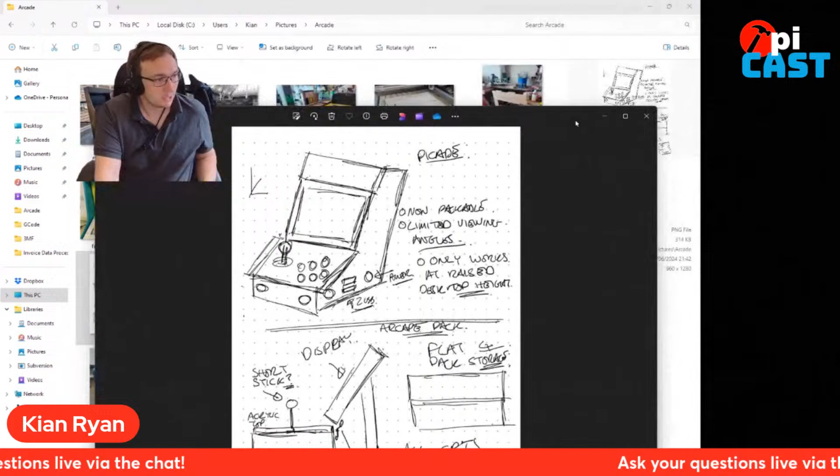So we started off with, here you go. Started off doing some sketches for them. Small cabinets getting bigger and bigger and bigger until we ended up eventually at full-size cabinets. And we made these in-house. CNC'd them on our Shapeoko Pro. And this is our full-size cab that we've ended up with. It's a collapsible cabinet. And in fact, half of it is with us today.

So the whole point about this is that all of the guts live in the top section. In fact, this top section is currently with me here today. So this is the top half of the cabinet. All of the guts live in the top half. There's a Raspberry Pi 4 in here. It's an elongated Picade. Pi 4, Pi Hat, Player 2, two sets of arcade buttons, two sets of consoles, a rollerball because everybody loves playing a bit of Centipede.

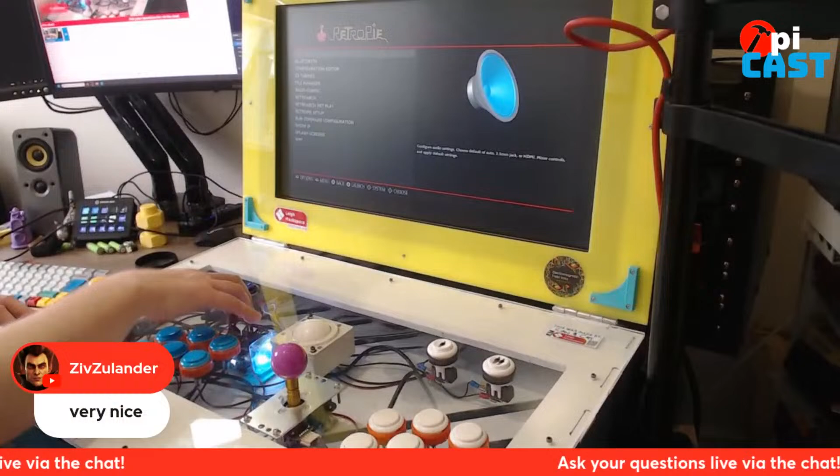Components from all over the shop. We're not just using Sanwa buttons. We've now got some from a Spanish supplier as well. 23-inch display that runs off 12 volts. We take a singular 12 volts 4-amp input coming in from the back. We split that. We use a buck converter to power the Pi, 12 volts going up to the display. So we only need one singular power supply, and all of this lives in this top half of the case, which means that we're free to deal with the rest of the cabinet as a separate entity.

So this lives as just a set of stackable sheets. And if I go to, and we can just treat them as a whole bunch of collapsible things.

That's the worst. I hate this photo with me, but I look like a sitting Buddha at this point.

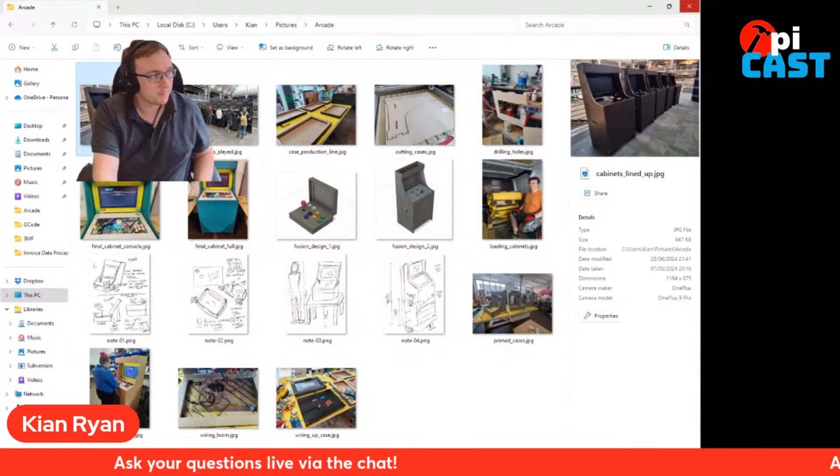But we built all 5 sets of cabinets. We collapse them down, throw them into the back of the van, take them down, set them up for the clients. End of an event, they can go and collapse them, take them off and store them flat, and take them off to what they want to do next.

That's awesome. So with the collapsible nature, how strong are they? I mean, arcade machines are built for energetic fighting. They're going to take some abuse in general use. Will these take some stick? These will take a fair amount of stick. It's 18mm MDF. It's held together with furniture bolts and nuts. Yeah. Which nuts are sat on my desk still. The pieces are pieced together using butt joints on the sides.

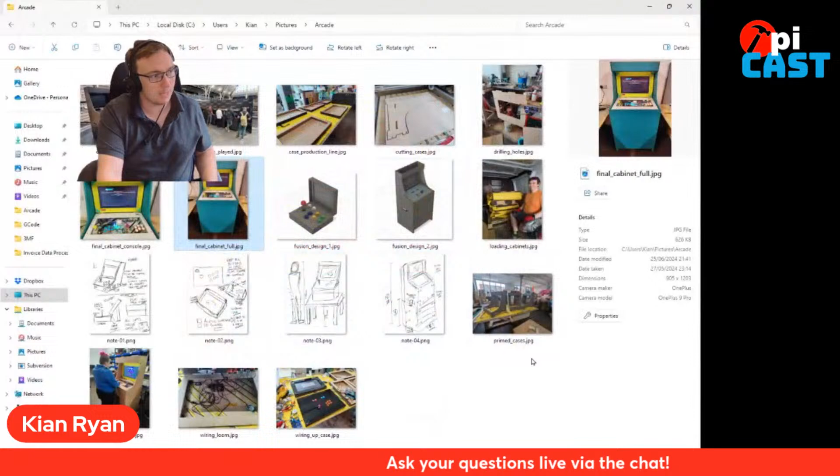I love the way it opens on the wrong screen. You have to drag it across. So the whole piece slots together and then holds itself under tension using the bolts. Top half drops onto the second half, and because the whole piece holds together with the bolts, it ain't going anywhere. It is absolutely not going anywhere. Wow. And it weighs a fair amount as well.

I mean, by the time you've put the top section in, we were wondering, when we did the original specification with the client, we were talking about, do we need to strap this down? Are we going to have to? And then we built the first one, and we couldn't pick it up. Not on our own. And that's when we put the handles in the side. That's awesome. Version 2 ended up with handles.

Really? So, the weight, is there a decent bit of weight at the bottom as well? Obviously, you don't want it to tip over. Yeah, we added in holes to the back, access holes. I'd say a third of the weight is in the bottom half. Actually, more than a third of the weight's in the bottom half. The upper section, you can see, the scallop profile reduces the weight in the upper half.

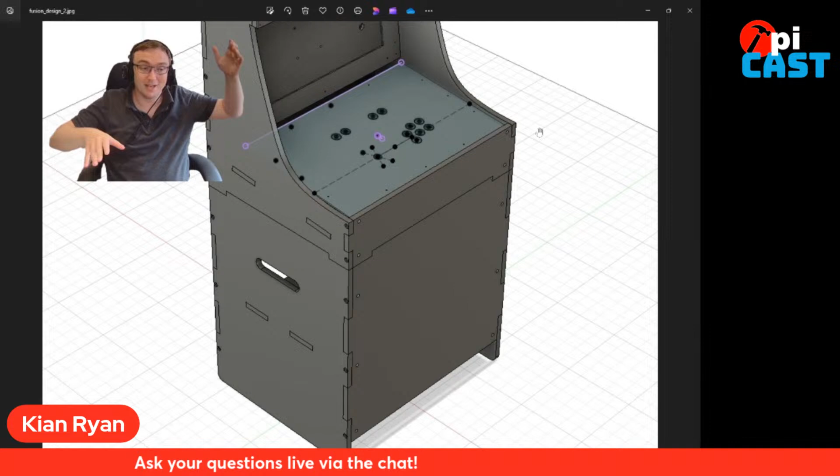It's a stable, solid platform. It really isn't going anywhere. There's a bridge that goes across the middle in the bottom half as well to add that extra bit of stability.

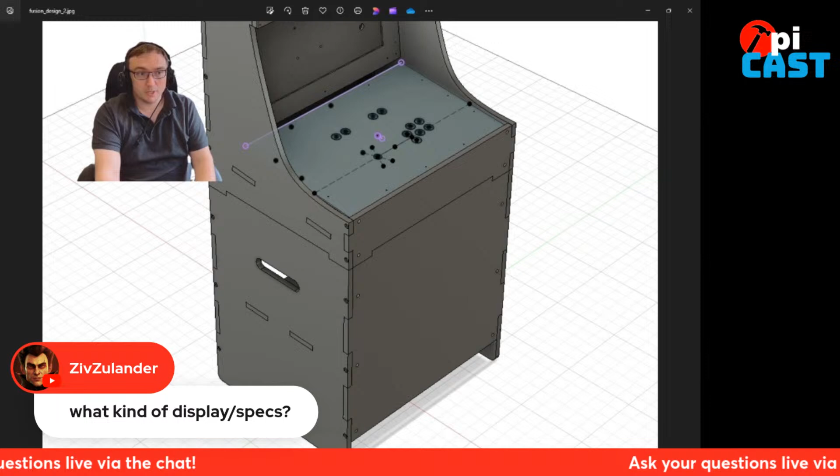That is very cool. So we've got a question from the chat. ZivZulander says, what kind of display and the specs of the display? Have you got those to hand? I do. They're not that fancy. They are 23-inch. It's a Cooler Master display. Takes a standard HDMI input. It's supposed to run at 100 hertz. It does not run at 100 hertz. It runs at 60 hertz. That causes a whole pain of grief.

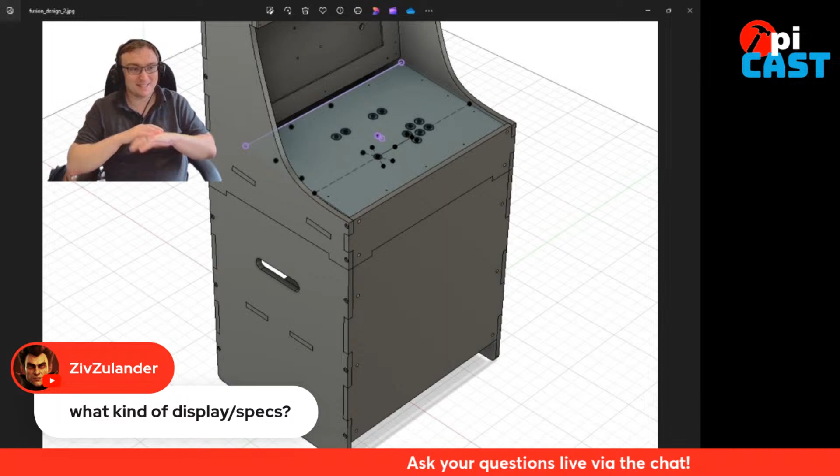Hooked it up to the Pi, got all the power splitting working, fired it up, played for 5 minutes, display blanked off. Oh no, I'm browning out the display. Start all over. Brown out. Out come meters, out come everything. No, there's nothing wrong with the power requirements. This display just doesn't want to run at 100 hertz in Linux for whatever reason. We're guessing odd HDMI modes.

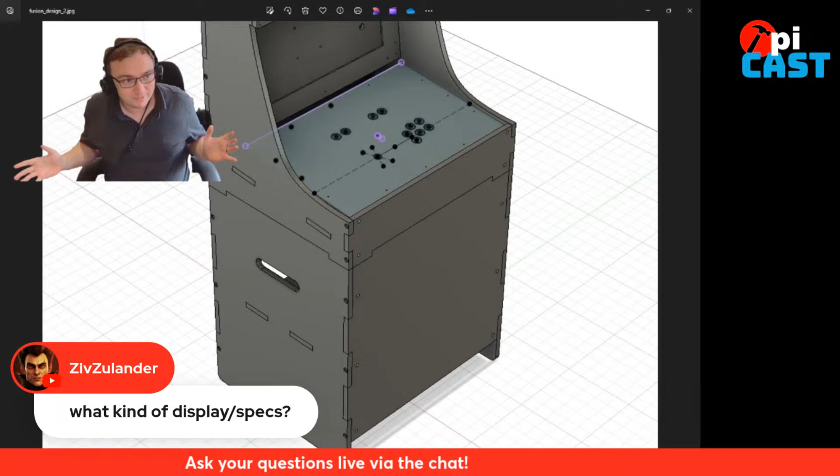In fact, there's another aspect to this we'll talk about shortly. But the in-house testing that we were doing was all using... someone's at the front door.

The in-house testing that we were doing was all being done using MAME, like you do. You're firing this up with MAME. You're playing Tetris, you're playing arcade games. So 60 hertz was absolutely fine. We forced the HDMI mode. Once we'd worked out that the issue was just to set the HDMI mode manually, off we go. No issues. Linux is a wonderful thing until the point.

Can you excuse me for 1 minute? I'm really sorry. I'm in the house on my own and someone's insistent at the door. I will be 2 seconds. I'm really sorry. This is a first.

It happens, right? I'm looking at the build, and I'm looking on Kian's website as well, Leigh Hackspace, leighhack.org, and I'm just looking at how it's been cut out. It's a CNC router that's cut it out, and it's the stuff of dreams that I want in my garage.

I'm so sorry, folks. It's okay. I'll order that pizza for later next time. It's like, if I ignore them, they'll go away. No, they weren't going away. That's all right. New components from RS Electronics.

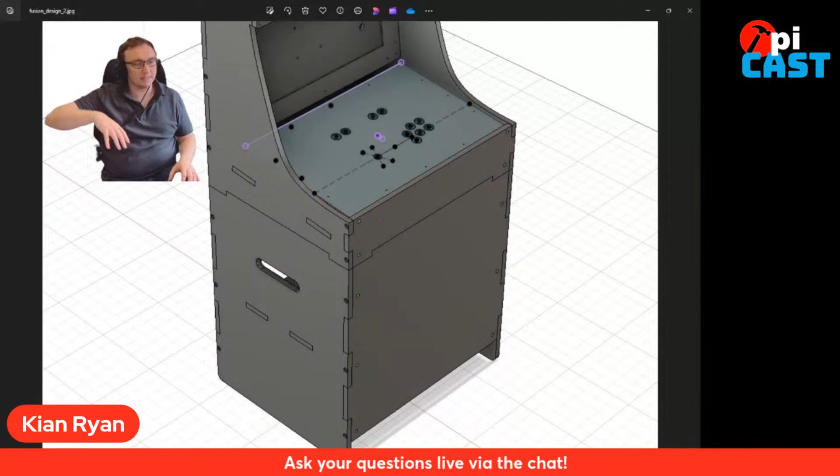So the cabinet is 1.6 meters high. It's broken down into two 800 sections. The front section fits into the 800 profile as well. Everything fits within 800s. First build we did of this. Where's the cat for scale? There we go. This was our prototype build of the cabinet. That front lip of the arcade cab, the banner piece across the top, looked great. Had a lovely Atari silhouette to it.

My wife is 5'2" to 5'3", give or take. She's the only person that can see underneath that profile. Great for kids, great for small people. Stood at 5'9", couldn't quite see the display in a straight line, so we had to adjust that profile. Couldn't adjust the height any higher, really, but just had to cut that banner back by about 4 or 5 inches to the final design. There we go.

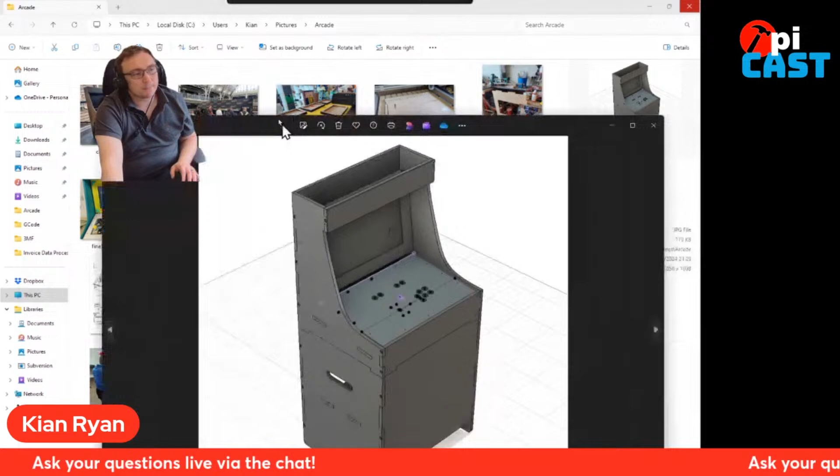Bring it right back so you could see the display at an angle, irrespective of your height. We're happy it works up to 6 foot plus. We have the tall people tell us it's absolutely fine.

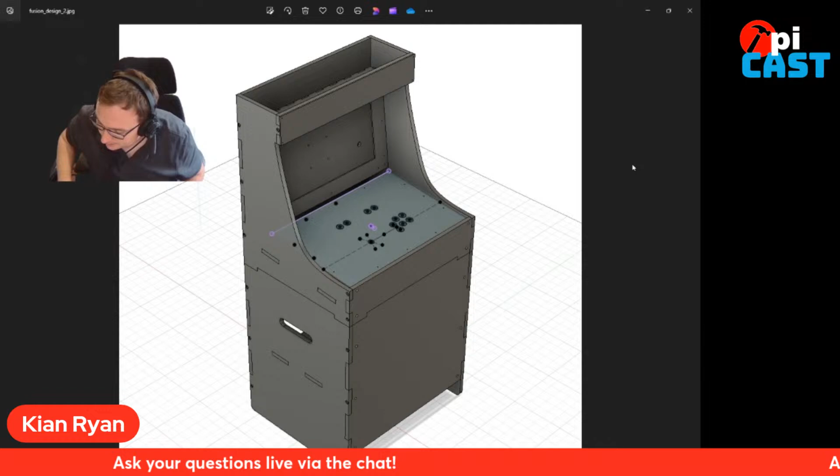That's very cool, mate. Also, I'm interested in the electronics. At the opening session, we had like a skirting over all electronics, but I want to know, what hat are you using for the arcade connections? It's the standard Picade X hat. Okay.

We actually managed to get away with... So this is a project where we had a limited amount of time and a moderate amount of panic. This has to be done in a time frame and get it delivered. Let's try and do this without... So right down there.

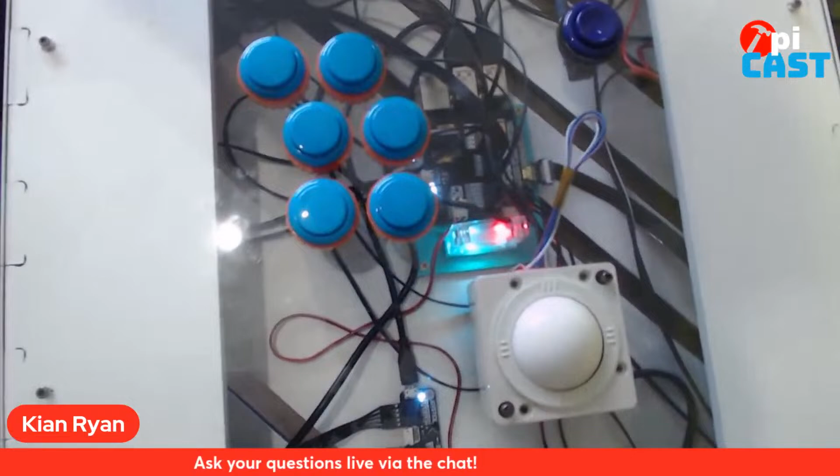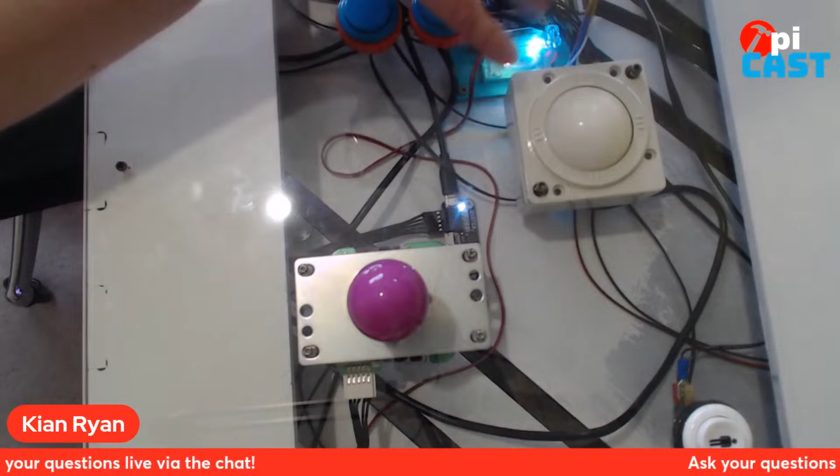So yeah, it is a standard Pi 4. It's running a Picade X. It's running a Player X. So the ones that we shipped were single-player consoles. This one is a 2-player version that we built for the Hackspace because we wanted to give it that little bit of extra. All of the ones that we shipped out for clients were a single-player Picade X hat.

All of the components we sourced from Arcade World UK, who are unfortunately no longer with us. Make sure I've got that. There we go. But all of the components just directly use connectors directly into the hat. So actually, trying to debug this is really straightforward.

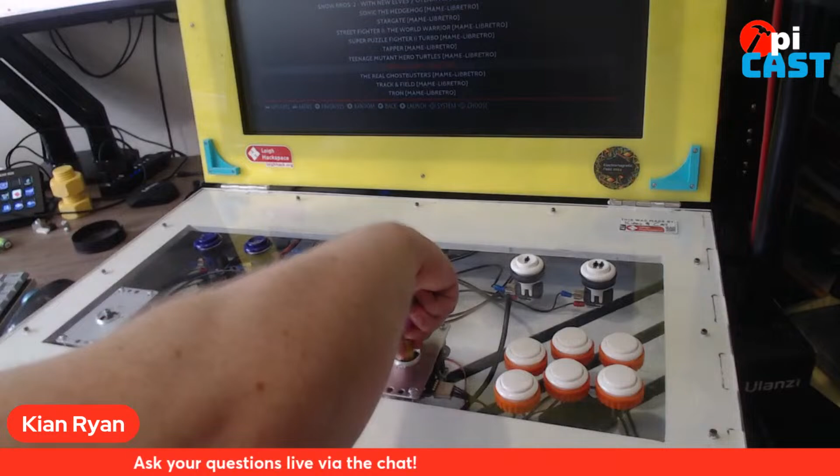These sticks are standard Sanwa sticks, and this is a nice little adaptation. This is a mod from a company in Spain. You take a standard Sanwa, you take their little piece of kit, you basically take the Sanwa stick apart, you put this in, and it's just a little ball bearing clutch internally that allows you to mount one into the other. And that means that, end of the day, when you're done, you turn the cabinet off, and that allows you to close the screen down, and that's your folding cabinet. And that allows you then to stack and transport the cases.

Don't overcomplicate your answers. We just stuck a metal dowel in the right-hand side that pokes out. So when you've got the screen up, you push the dowel into position, and that stops the case from closing. It stops any smash accidents. If it works, it's a simple answer to the problem.

That's nice. The Player 2 aspect on this cabinet, it's one of Pimoroni's other boards, isn't it? It's a USB board that plugs into the Pi. Yeah, called Player X. That's it. So where the Picade hat acts as a keyboard input, the Player X hat acts as a joystick input. So getting those two to talk to each other can take a little bit of wiggling. So there was a little bit of customization on the RetroArch profile to set the Player X as the second player and allow the Picade X to work as the first player.

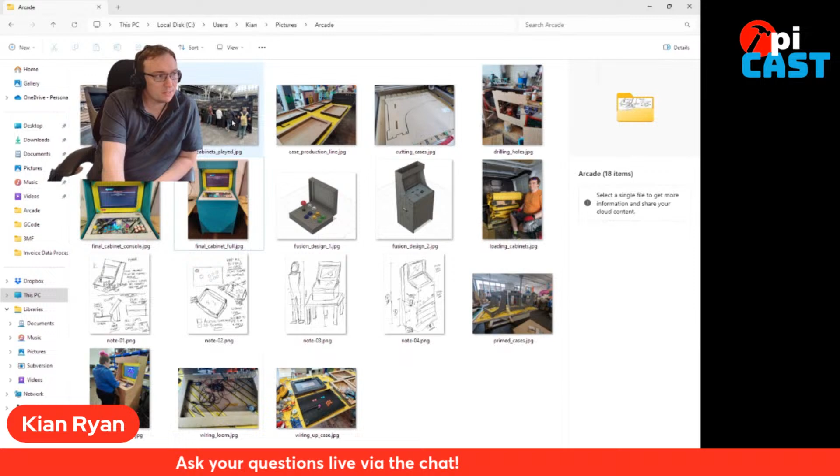Right, so you've got a Pi 4 in there now. Yep. Obviously, the new hotness is Pi 5. So why are you not using Pi 5? I mean, we had some fun with, and this is a tale of almost heartbreak. So, when we were building this, running this at Devoxx, the plan was to run it with some custom Pygame games that Dan Hardiker had developed. Yeah.

So 5 games, they were based on the Code the Classics book. You grabbed the source code, done a bit of work around that, turned them into custom games based around the individual sponsors, talked to some of the original authors from some of the stuff that was based in the book.

Worked around that way, got these 5 games up and running. So we spent a good chunk of time, and there's nothing like a deadline. Hardware was ready the weekend before the event. That was the first opportunity Dan had to test it on Pi hardware as opposed to running it on standard PC hardware.

And it hit a couple of performance bottlenecks. Fair enough. We'd initially set up, he had run it previously on a Bookworm install, and these were configured for prior to Bookworm because some of the Picade extension stuff wasn't working properly on Bookworm at the time. I don't know if it's working on RetroArch, I think it's not working on Bookworm. It's got to work on distro before Bookworm, Bullseye, thank you. So these had been configured for Bullseye.

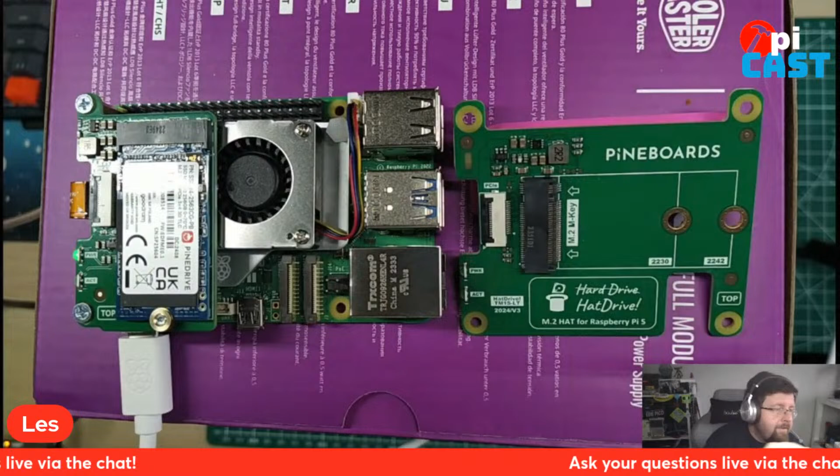Let's get my pointing device and get the overhead camera on. So there is the old Pineboard. That's the hat drive top board. It goes on top of the Pi, and absolutely fine, no problems whatsoever. It's a great little board for getting 2230 and 2242 NVMe drives on your Pi.

It just works. But what if you want something a bit smaller, something that's not going to block the airflow of your Raspberry Pi 5's active cooler? Well, here you go. It's $10, €9, £9 for myself. It's pretty much that shrunk down to half the size, and it accepts 2230, 2242 drives, and it can also be used with AI boards like the Hailo-8L and other Google Coral TPU boards.

Literally just connects to two of the M2.5 mounting posts. There's your PCIe connection there to the board. Put your OS on there, and away you go. So I've literally built this about an hour ago, so I've got no benchmark testing, no data to say how fast it is, what performance is like. But if it's anything like its older family member, it's going to be just as fast.

But I want to see what it's all about. For €9, $10, that's cheap. That's almost just like forget about micro SD cards and just buy one of those. Obviously, you've got to buy a drive. That's a 256 gig PineDrive, one of Pineboards' certified drives to work on the Pi.

Because originally, when all of these M.2 hats came out, there was a bit of compatibility issues, and trust me, I have lots of drives to prove that. In fact, here we go for the camera - there's all different M.2 drives I bought or had in stock already just to test.